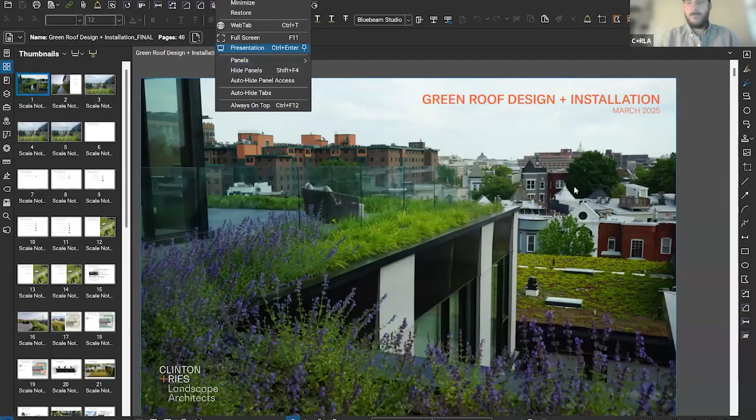So yeah, we're going to talk about green roofs today, and we're going to analyze it through one of our projects that we worked on about 5, 6, well, I guess closer to 8 years ago. It's a building called Chapman Stables in Washington, D.C. The building was in active design when I first joined the firm. So I kind of was on the tail end of the design side and then worked a lot through construction administration as the building was being built.

And we've been fortunate enough to stay engaged with the building by working with the landscape subcommittee from the residents, as well as working with maintenance staff and the landscape contractor that maintains the property. And even this past summer, we held a Cultural Landscape Foundation tour of the building. So it's really nice to remain involved and be able to see it as it evolves from installation and through people living in it and enjoying it, and now.

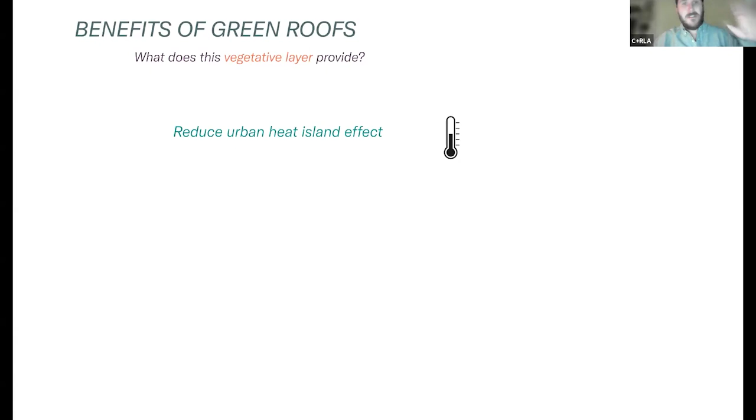And so when you are eliminating all this heat, naturally, you're also decreasing the building energy needs. So your roof, it's not absorbing all that heat and holding it. The plants are taking care of that. You don't need to cool your building as much.

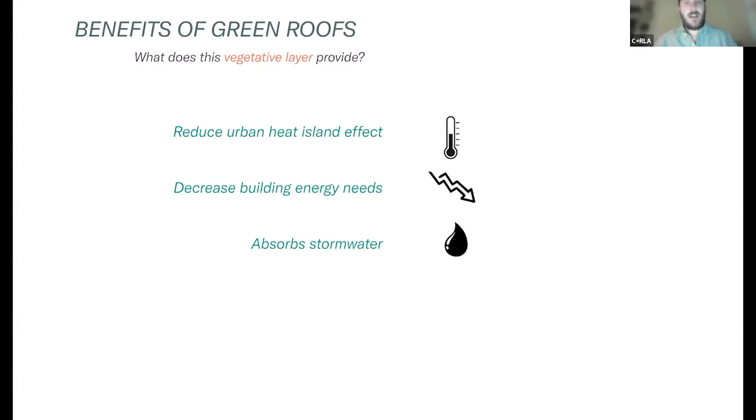Another really important thing they do is they absorb stormwater. So again, thinking about a traditional roof assembly, when it rains, almost 100% of that water is ending up in a drain, down a downspout, and into the storm system.

With a green roof, there's plants, they are catching and absorbing water. The soil, the growing media is holding water. There are layers to a green roof for water retention that help capture water and hold it for the plants to use at a later time, and inevitably reduce the overall surge during storm events into the storm system.

They improve air quality. We all know you buy a snake plant or a ZZ plant or a pothos, and they say to put it in your bedroom at night. They are working the graveyard shift. They're taking all that carbon dioxide, they're turning it into oxygen, they're improving your sleep. It's the same idea, just on a much larger scale.

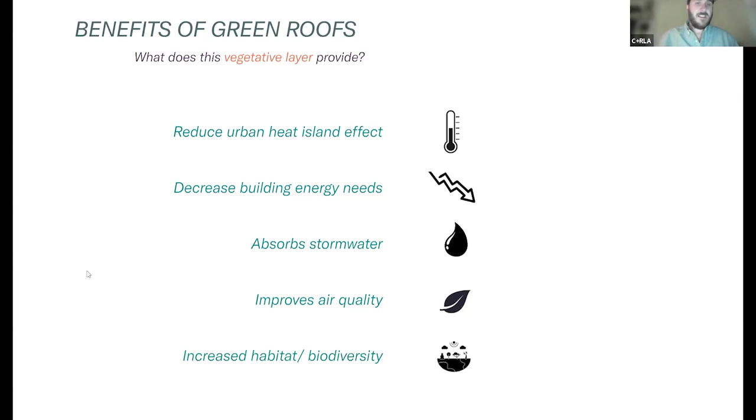So now you're taking all these plants, and all night they are just purifying the air, and can significantly improve the air quality of that rooftop. And then the last thing is increased habitat and biodiversity. And it seems silly, like a little rooftop plot, how significant or impactful can it be?

But it's actually studied that they can improve specifically biodiversity of insects and subsequently birds, by 15 to 20%. And the birds and insects will seek that rooftop out over others for obvious reasons.

And I'm sure some of you or all of you are familiar with the Homegrown National Park movement, just the idea that if we all change a little bit or all of our front yard into native plants, then your whole property and a block can start to turn into a national park and really change the ethos of these current manicured lawns that we have. So that same kind of concept can apply to building rooftops.

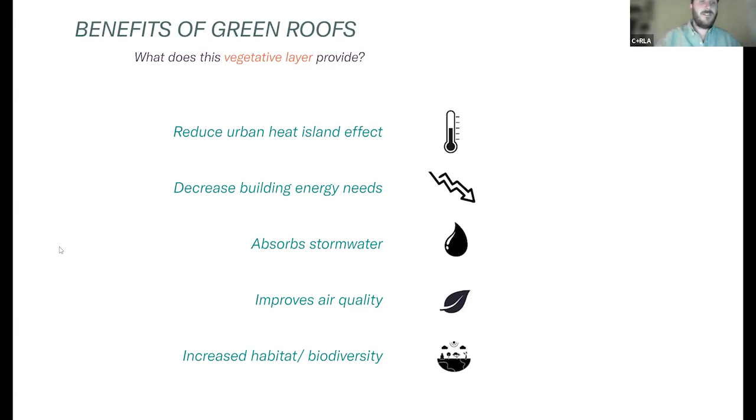And so what types of green roofs are there? Because there's several. And there's two distinct types that are defined by the soil depth. And so those are extensive green roofs, which have a depth of less than 6 inches. And then there's intensive green roofs, which have a soil or growing media depth of more than 6 inches.

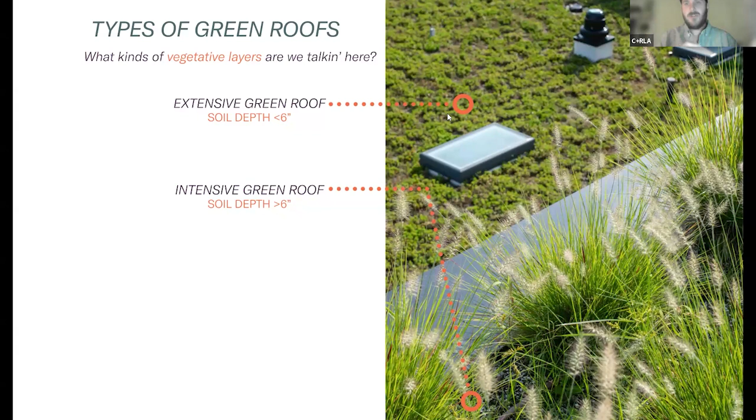And this picture is kind of nice. So you can see in the background, there's a lower portion of the building, and it has much lower growing sedum mats on them, and we'll get into what sedum mats are, but you can see it's not even the height of a window. It's just a little thin growing media.

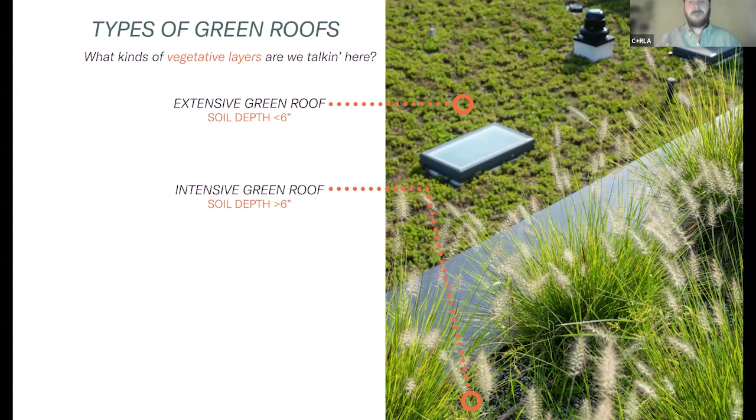And then where we have a little bit more room on this upper portion of the rooftop, this is closer to the amenity terrace. There's a deeper soil profile. We can get some bigger perennial plants in there to grow and fill in and look beautiful.

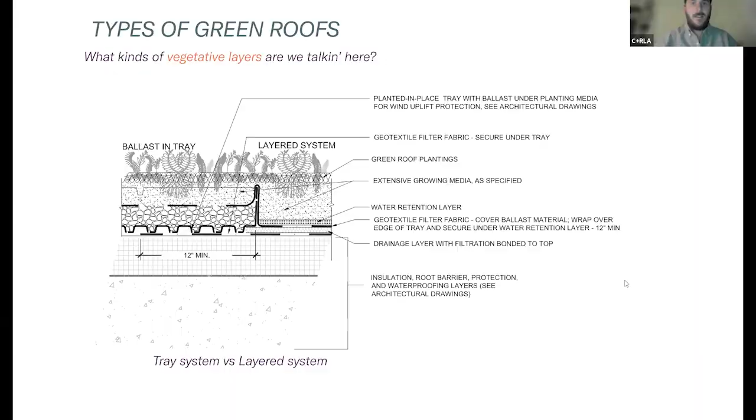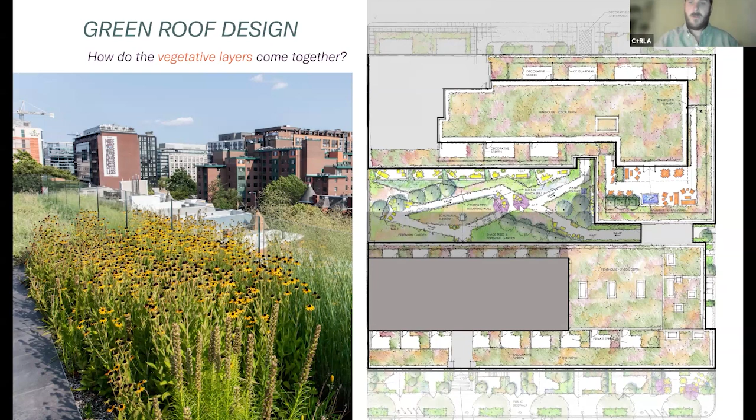And so this technically is also a green roof, and we'll talk about the differences in the assemblies of this central courtyard as well as the rooftop here. So just a quick diagram. As you can see, there's intensive green roof. So we're talking more than 6 inches of soil that surrounds the amenity terrace and these areas for the residents for their gardens. There's a small pocket here of intensive green roof, and then the central courtyard is intensive green roof.

And then this mechanical rooftop and this other portion of smaller balconies that overlook the central courtyard, and this series of mechanical roofs for the existing building, those are all extensive green roofs, so less than 6 inches. And in this case, we were dealing with a 4-inch growing media on these buildings. And that was set by the architect.

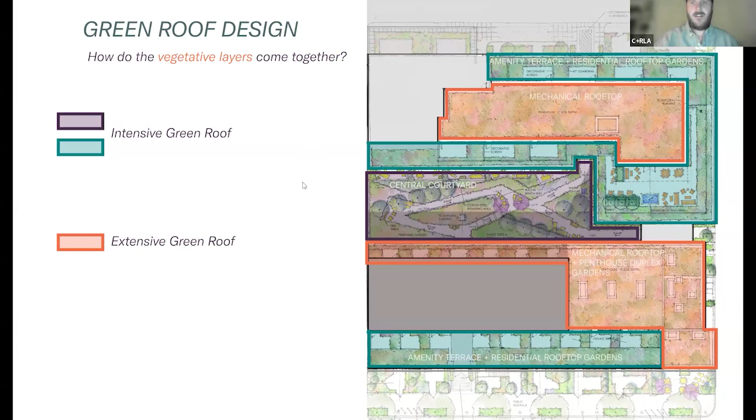So based on where the finished floor elevation of these penthouse apartments were and the parapet wall, we only had about a 4-inch depth to work with. So that makes that extensive. And then the other areas we had a little bit more leeway. We can get some deeper soil depth in there for our perennials. And so here's a detail of intensive green roofs from this project.

We'll touch on all these individual layers in a second, but everything layers up, and this is a layered portion of this green roof. So on the left here is the parapet wall, and you can see each of these layers wrap up the side, and we call it creating the bathtub, because it helps hold water and prevent that water from getting down into the insulation and onto the structural slab of the building and the roof.

Here, immediately next to the green roof is a pedestal paving system. So this is a porcelain paver that's like 3/4 of an inch thick. And at each of the corners, there's these pedestal systems that you set the paver on top of. And immediately adjacent to that, there's a metal aluminum edge restraint, and that helps hold the soil in on the plant side and prevents soil from washing out underneath the pavers, where there's all sorts of conduit, and allowing any water that isn't absorbed by the green roof to make its way out to the roof drain.

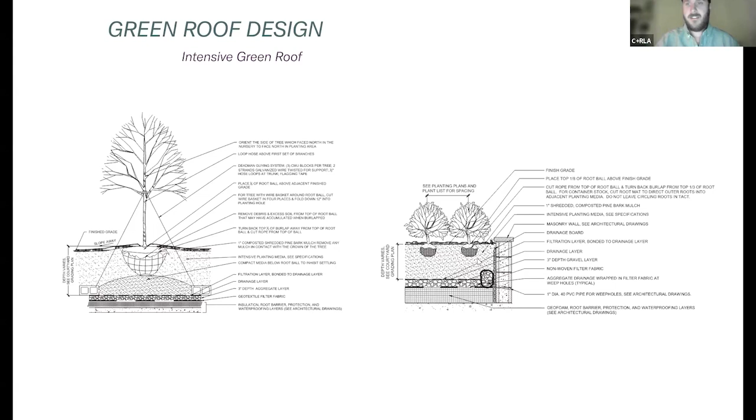And then you can see here for the shrubs, one of the big things we deal with when designing and speccing green roofs is their weight. And we'll touch on that when we talk about growing media and soil. But kind of a trick to get around that is to identify areas where you might not have really deep rooted planting, and you can use a geofoam and help build up the elevation so that it's super light. You have just the right amount of soil you need based on the plants you've selected. And it helps the structural engineer, it helps the architect, and it keeps us able to plant it over time.

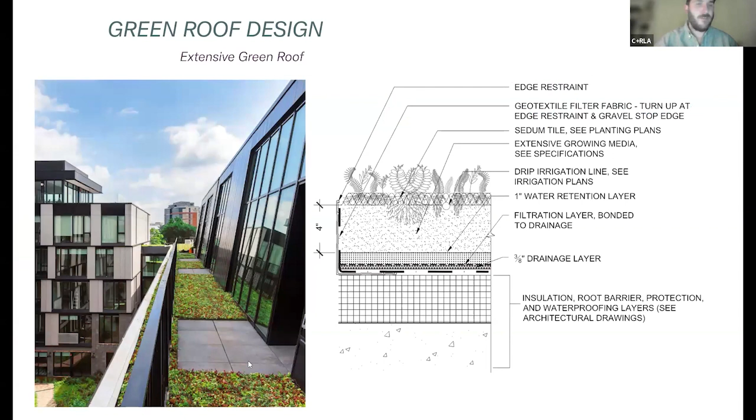And then this is an extensive green roof. So this is a 4-inch depth here. So you can see all the same layers, and then the green roof mat here. And then how that feels much different than, say, this image where you have all these perennials coming up and filling in beautifully. And then these just remain as these little sedum succulent gardens, where we don't have that rooting volume depth based on the design of the building. So it really allows us to kind of jam green roofs in wherever we have roughly 4 inches. And we talked about all the benefits. It really can go a long way.

So yeah, green roof design, analyzing each of these layers. And so I brought this NYC Gov Parks definition back, and waterproofing, root barrier, water retention, drainage, growing media, those are what they're defining as elements that make each of these systems actually a green roof.

And so the first one is waterproofing, and that is typically specified by the architect, and it's tied to the roof system assembly that they want to use. There's a couple different ones, and it's usually that way because as the roof is constructed, it's constructed on a warranty. So when you select one type of roof assembly, it ties you to what brand of green roof, a type of paver, a type of root protection, growing media, yada, yada. And so when the architect picks what roof assembly they want to use, it triggers to us what type of green roof assembly we want to then move forward with based on what they're using.

So we saw in those details, after that waterproofing layer is a root barrier, and that's just an LDPE or HDPE product. It rolls out on a mat like you can see here, right on top of that waterproofing layer. And it's twofold. It obviously helps prevent roots from going down, but it also is just an added layer to prevent water from making it down and being in contact with the waterproofing. This way, you're just keeping yourself as many checks. Ultimately, with buildings, you want to keep water outside of them.

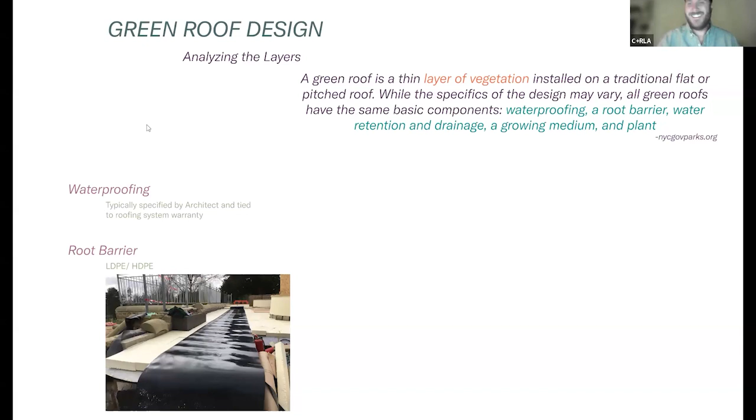And then water retention matting is something that's not always added, but it's usually added right above the drainage board. The water retention matting will hold the water. Whatever excess, once it hits capacity, will then drip down into the drainage board. So it's just kind of an added measure of protection below this green roof system.

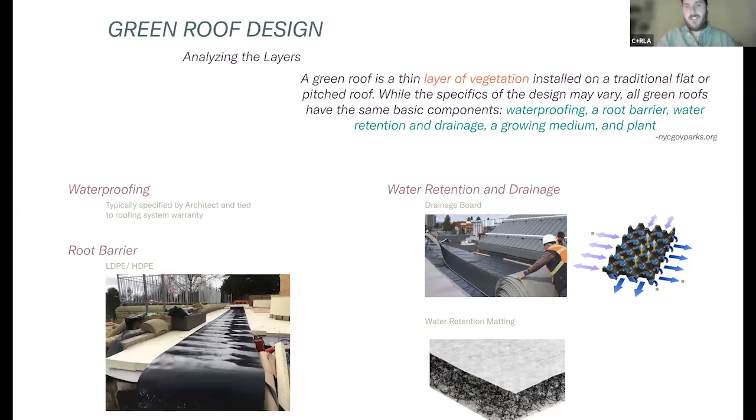pretty wild to see. But so the typical composition of your growing medium is an inorganic material like porous stone, or a lava rock, and part of that is to help reduce weight. Soil is very heavy. Then there's an organic material like compost or leaf compost, and that is to provide nutrients for the plants. And then there's sand added for structural and textural qualities.

For green roof systems, there are a lot of branded media options now. So rooflite is one. American Hydrotech extensive or intensive green roof is another. Green Roof Solutions is a third. There's probably a dozen more. These are three we've used in the past. And it's just slightly varying types of lava rock or porous stone, or some use pine fines versus hardwood compost. So again, which of these products you would use depends on the plants you want to pick. And again, it also sometimes ties into that warranty.

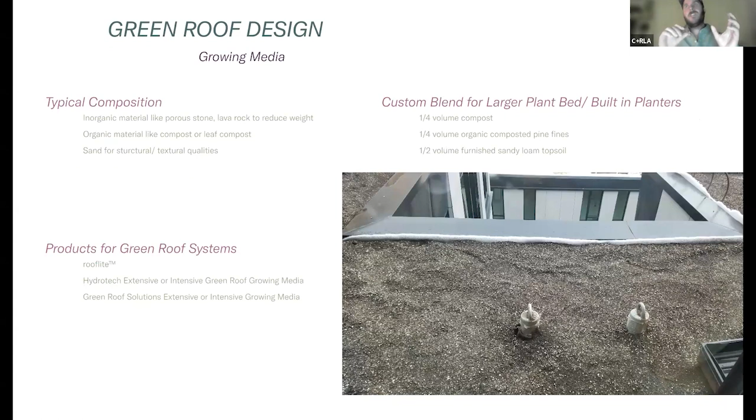We have done both, and the benefit of using seed is you get this really organic display for the planting. Same idea as if you were to seed in a meadow, you get really dense planting. Everything's coming in right next to each other. They're competing and filling in, and you get this really beautiful patina that is designed by ecology, which is really nice. And we like to use that on our mechanical roofs, or if there's a portion of the green roof outside of the amenity terrace that the residents can't get to, we'll do a wild mix of seed, and it looks really beautiful.

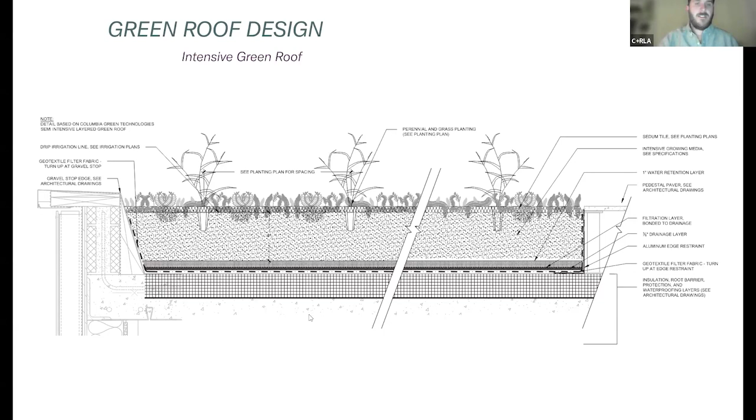But then if there's any areas right up next to the amenity terrace and we want it to feel more like a cultivated garden, that's where the benefit of being able to use these landscape plugs is. You can really get cute with how you lay the plants out. You can do nice big drifts, if you want to do that. So it just gives you a couple options on how that physically gets planted.

So Achillea Moonshine, which is a hybrid yarrow, really beautiful yellow flower, long blooming. Coreopsis Zagreb, threadleaf Coreopsis, that just does so well in the heat and the rough condition of a green roof. Same with Liatris, as well as the Muhlenbergia, which is just a phenomenal fall champion with its beautiful pink seed heads.

The Panicum, we actually had to come back in at the request of the landscape subcommittee and thin some of the Panicum out. It was really, really happy up on the roof. A couple types of Rudbeckia, and last but definitely not least, Sporobolus, prairie dropseed.

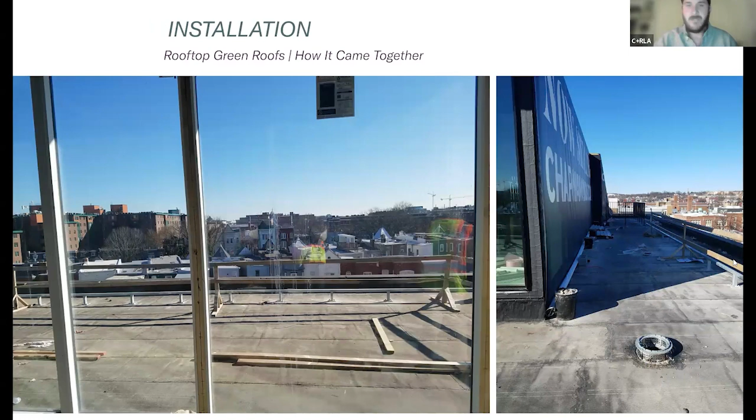And so installation. You can see this photo is on the amenity terrace of the building. We're looking out, and this is just roof, structural slab. This is what it would look like if it didn't have nice pavers or planting on it. That's asphalt. This is a future roof drain below the pedestal pavers. And on the left here, this is that root barrier going down.

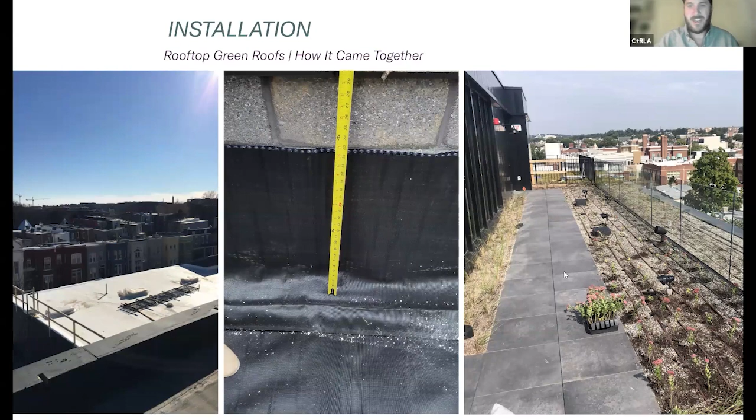And then in our layered portion of the system, we start to wrap some of the parapet wall and adjacent elements with our drainage board. Ultimately the soil gets piped up, the plants arrive and get laid out, and it looks pretty uninspiring on day one with all these little plugs getting jammed in, but as you'll see, it fills in quite beautifully. Here is another corner of the amenity terrace, and this is looking back. There's a matching image of this after it's planted that we'll come to.

And then in the central courtyard, as I mentioned earlier, I wanted to compare the two. Underneath these cranes, that's the top of the parking garage roof. So we have all this room for soil media, but soil's very heavy. This is where the architect comes in, and we get in a meeting with the structural engineer, who says, guys, this is too much soil. So we need to get creative with how we build this up and maintain soil depth in certain areas, but also achieve the design weighted load for that rooftop.

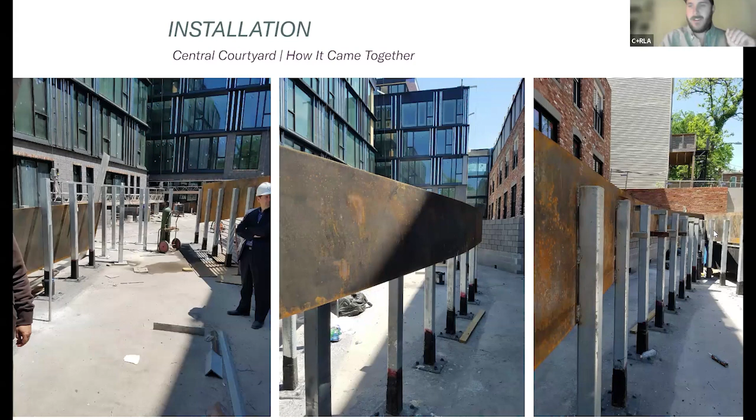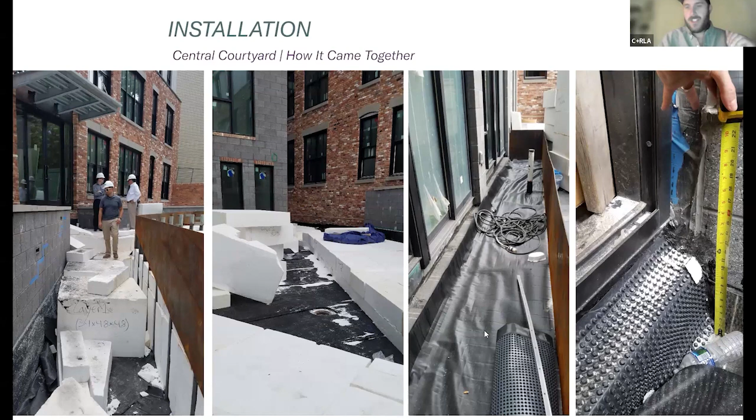But after that, we have all this layer of foam that gets put in to help build up in a lightweight way where these plant beds are. And even here, this is a walkway. So there eventually will be paving on top of where this guy is standing. And then in some of these other areas, there's plant bed. And then on top of that geofoam, that's where we come in again, our root protection and drainage layer. And then, same day, soil comes in, it gets piped in, and everything gets laid out.

Here, you can see by the tape here, there's a couple stairs that lead down here. So those were precast stairs. So we were waiting on the precast stairs to arrive. So this remained a geofoam and wood ramp for the contractors. They were not too happy about that, carrying plants up and down that, but they work hard like the rest of us, and we got it planted and laid out.

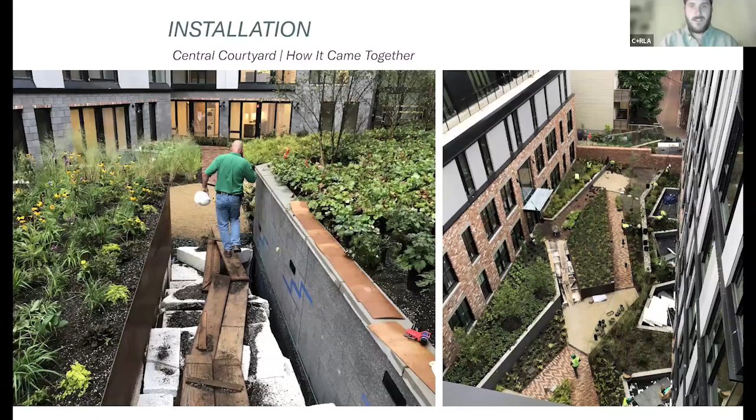So this is that same view sort of what this view is. So you can see after it's just planted, how everything is nice and small, little landscape plugs. And then over the course of a year, it really fills in and looks just beautiful. And I wish I lived in that penthouse right there, maybe one day.